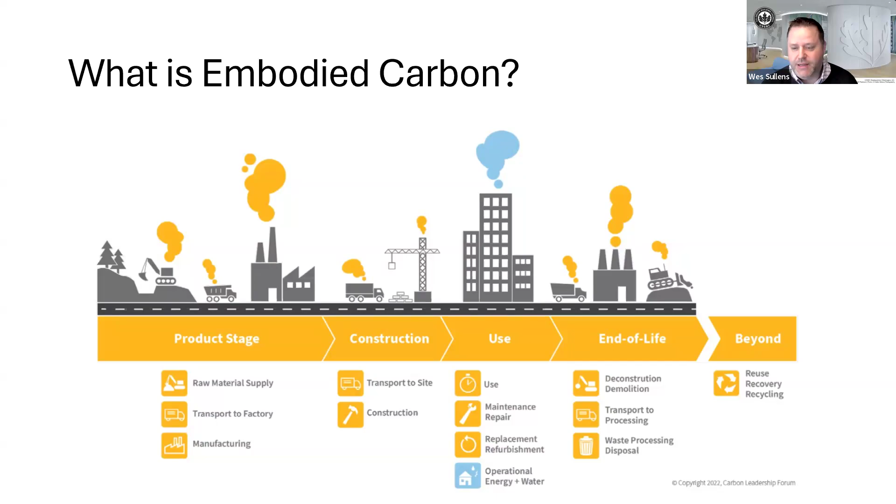And typically our policies have been focusing on operational, but in the last 5 or 10 years, there's been an increased focus on embodied carbon. And you might ask why that is. Well, the next slide shows a snapshot of the global stage of where emissions are at. Globally around 11% of greenhouse gas related emissions are attributed to building materials. Now that's at least, because we've seen studies that go higher than that. And in California in particular, it's probably much higher. But at least about 11% of global emissions, which is a big chunk of the GHG related pie.

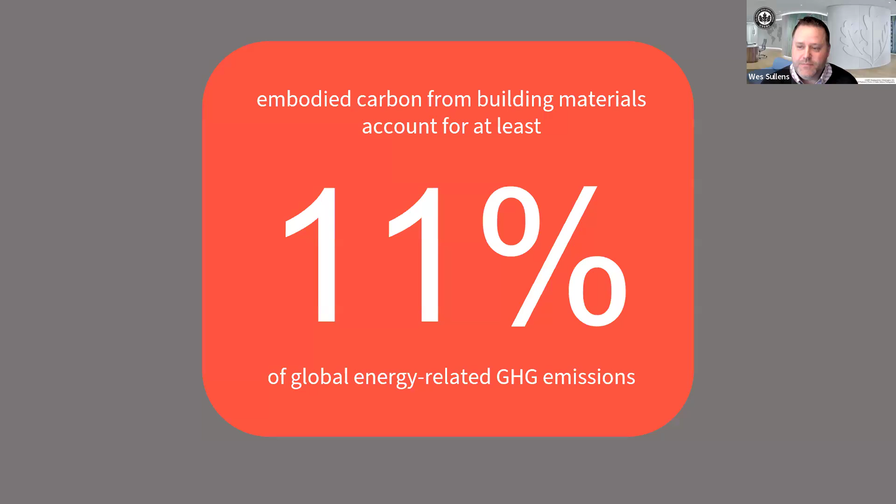On the next slide, you'll see some more recent data. I borrowed this from our friends at CARB, the Air Resources Board. They had a webinar workshop last week talking about efforts they're doing to cut down on embodied carbon of materials. And they shared this stat that essentially as California's building codes require near zero emission buildings, operating buildings with renewables and our renewable standards for all of our fuels in buildings, the embodied chunk of overall emissions has been growing and is now approaching something like half of all emissions from buildings.

Now, this study they referenced was from a subset of like 30 or so non-residential buildings and some residential. So it's by no means a cut and dry subject, but somewhere on the magnitude of half of the emissions come from embodied carbon in California's new building stock, which is a huge number. And again, as buildings get more efficient, those operational emissions are shrinking, but the embodied are going up.

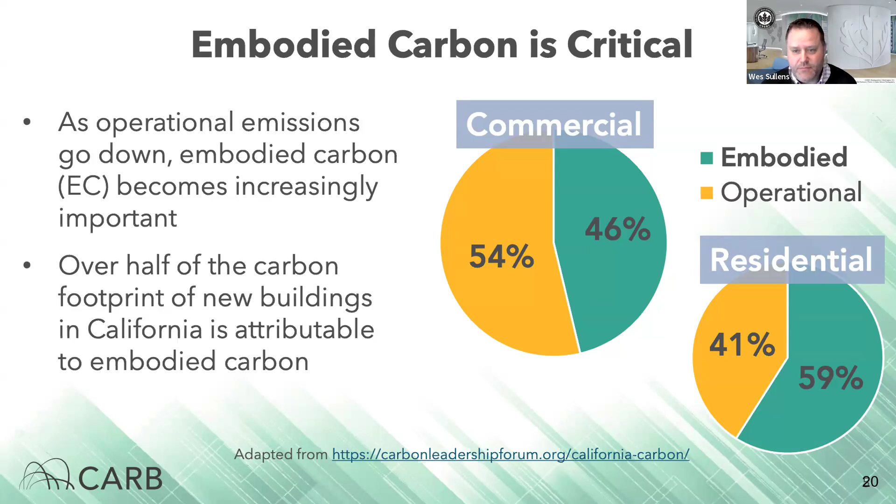On the next slide, this question of what do we tackle first, operational or embodied? And the answer is it's no competition. We have to do both, because a high embodied carbon building with low operating carbon still has a lot of emissions overall. Conversely, if you have a low embodied carbon building, but it's got high operational energy, then you have, again, high total carbon emissions. But what we need are buildings that do both. They're low carbon up front in the embodied carbon. They're low operational. There's end of life steps you can take to recapture those emissions and put them back in the system, and you end up with lower total emissions overall.

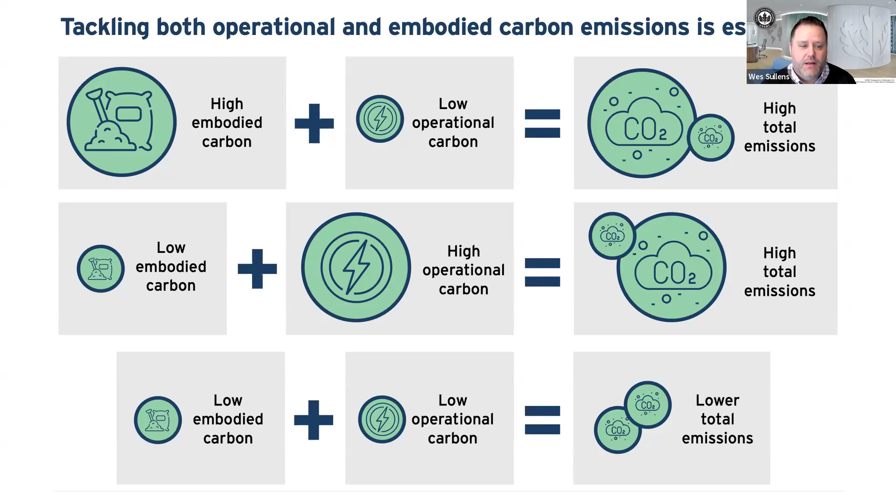And in addition to that, there's no one single thing you can do to cut embodied carbon, but it's really a combination of interventions that result in the deepest reductions. And so you need to do things like consider reusing a building or salvaging the materials, building your building more compactly or optimizing the structure so that you're not over-engineering the concrete or the steel. And then once you're in the phase of actually designing the building, go and select the lowest GWP products possible.

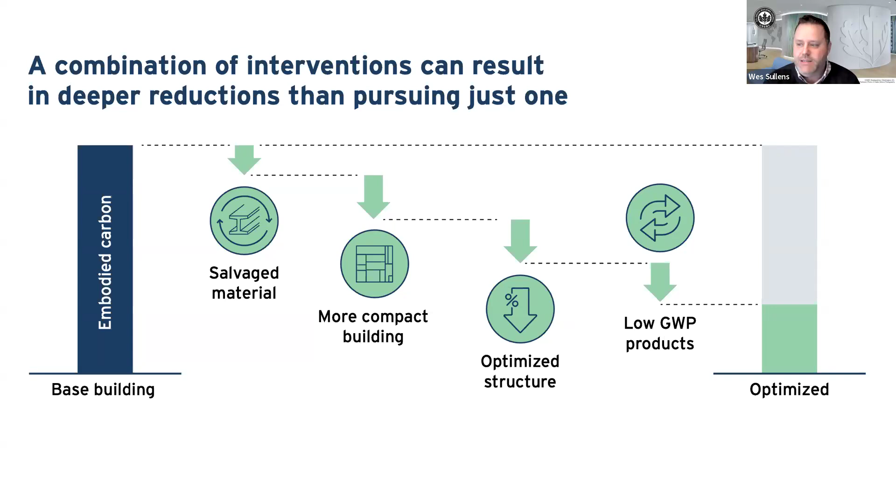On the next slide, I'll give you a second to snap this QR code, but this is a study we did with RMI. There it is, thank you. USGBC and RMI released this report at the end of 2023 on driving action on embodied carbon in buildings. And all the infographics you just saw were from that report, and I encourage you to check that out as a way to learn more about how to reduce embodied carbon in buildings. So I'll give you a second to snap that QR code.

And this is really, it was the first code in the nation to address green buildings. And just last year, they started requiring embodied carbon reduction measures. And the way this applies, it was meant to be a modest entry into this space because there's quite a learning curve for our industry to pick up the embodied carbon strategies and how to cut and reduce them. So it started with a modest attempt at applying embodied carbon reductions to the largest buildings first.

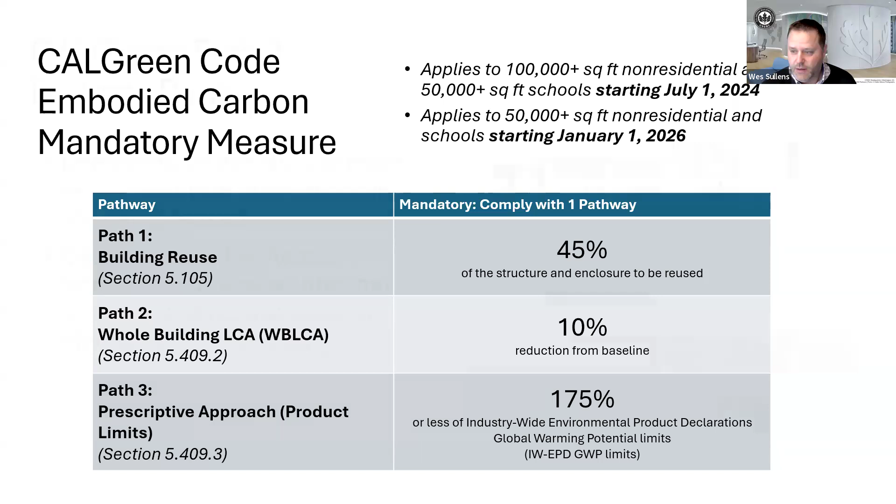So 100,000 square feet and up non-residential new construction buildings are covered under this code requirement. For schools, the threshold is 50,000 square feet, and that all started July 1st of last year. Now, starting in 2026, the idea is that threshold will ratchet down to 50,000 square feet, and projects will have to meet one of the three pathways to cut embodied carbon emissions: building reuse, whole building LCA, or a prescriptive approach using EPDs. The next slide, I'll show kind of a deeper dive into the first path.

Building reuse, I'd say the highest and best thing you can do is reuse a building, because if you don't need to build new, you certainly are emitting a lot less embodied carbon than getting all those materials new. And so it was recognized that a significant reuse, like I would even say, 30, 40, 50% of building reuse would be well and good, and you wouldn't have to do any of the additional pathways to cut embodied

carbon emissions from buildings. So the state recognized this by putting in an easy path, if you will, showing that if a project team reuses 45% or more of the structure and enclosure, they do not need to do the rest of the code measures. That it is sufficient for saving embodied carbon.

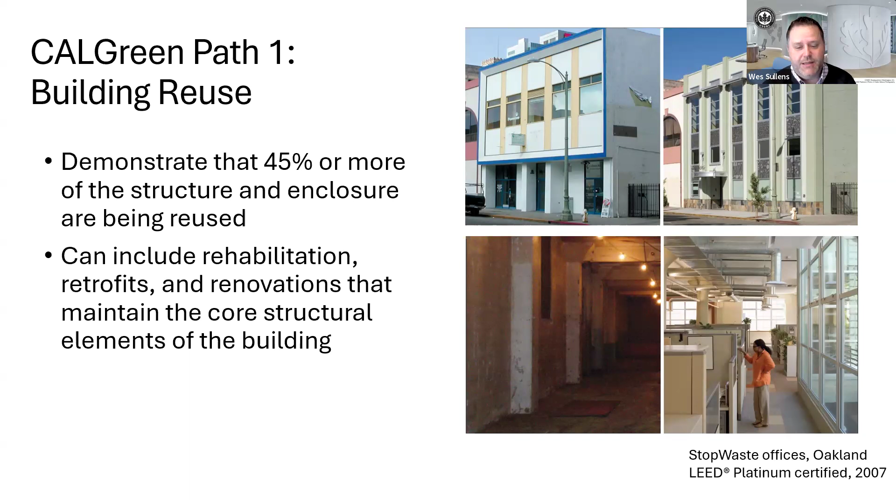The second path is whole building life cycle analysis. And it's like doing an energy model for your building, where you use software typically to show a baseline of what the building you're building would have been if it met all the kind of just industry average values for embodied carbon. And then you do a comparative assessment of that, showing reductions from choosing better products that have lower embodied carbon, or better strategies like dematerialization or lightweighting of elements of the building, things like that.

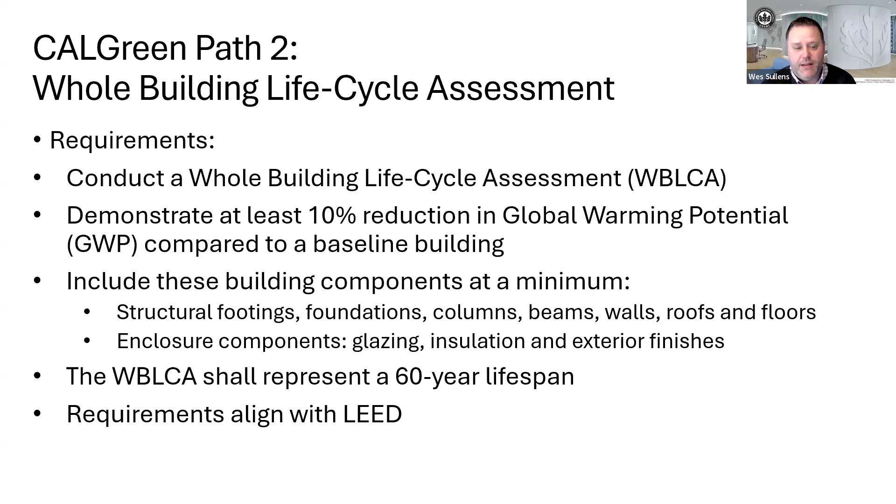And whole building LCA is requiring the project to analyze the structural things like footings, foundations, columns, beams, things like that, and some of the enclosure components that have some of the highest embodied carbon. These requirements do align with the LEED rating system. That was intentional because probably the most whole building LCAs that have been done in California have been on LEED buildings so far, on those larger buildings.

Now, the third pathway that's included in this code is EPDs. EPDs are basically kind of a nutrition label for products, where it displays on a document the global warming potential, the GWP it's called, of each material. And in the code, you have to basically show that you're doing not too much worse than industry average. So it's an interesting thing. They say 175% of industry average. So you cannot be that much worse than some of the average products.

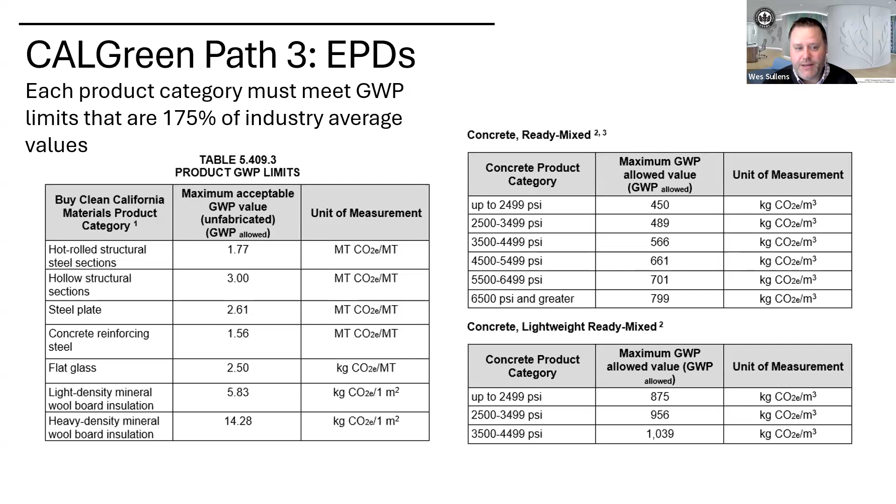It's not a total reduction yet, but it's the idea of getting folks used to the language of EPDs, collecting this data, getting it from manufacturers and concrete suppliers and such, and then putting it all together in a way to document that you're meeting or beating the limits shown on screen. So the way it's listed is, for each material that's on the left column, you have to meet the GWP limit or exceed it, meaning reduce it, and compile those all together to show that you're hitting the target.

Now, an EPD, on the next slide, I just put an example of what an EPD is, because they can be kind of daunting to find the information, but they're typically a PDF or something. They're getting more digital as the days go by. But you'll have a product from a manufacturer like this one, and it'll have some analysis and maybe a diagram or something that talks about the processes to make a product.

And then there's tables of results, like the one you see at the bottom middle, showing global warming potential and other impacts, because an EPD looks at not just global warming potential or GHGs, but also things that affect the life cycle, pollution, eutrophication, smog, things like that from the life cycle of a product. And then there's lots of signatures and standards that have to be followed. So EPDs have to follow a number of rules to make sure they're credible and can be used in CALGreen and other places.

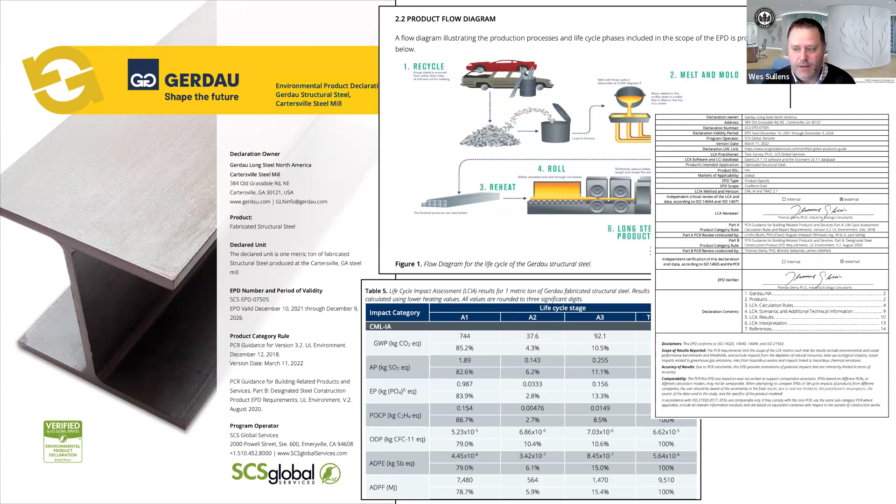So beyond that, there is action happening on codes at the state and federal level. There's the Buy Clean California Act, probably one of the first in the country, which requires the state to procure specific materials that are lower embodied carbon on their buildings. And that has since spread to other parts like CALGreen. CALGreen is kind of a reflection of some of those Buy Clean requirements into the building code.

There's also some efforts by the state to further regulate that with additional legislation. And that's what the California Air Resources Board is working on right now, to create a framework for measuring carbon. That's the bottom left slide. And by December 2028, they'll have a strategy to reduce emissions with a goal of a 40% reduction of those covered projects and materials by 2035. So very ambitious. There is some action at the federal level, although that is kind of yet to be seen, and it's on hold at the moment.

For local government leadership, there are some examples like a low carbon concrete code that was put in place in Marin County and Palo Alto. And in Emeryville, there's mass timber bonus points. Mass timber is considered low carbon compared to, say, a structure that's made of concrete or steel, although lots of mass timber also has a lot of concrete and steel, so they have to be done carefully. And you have to look at how the wood is sourced.

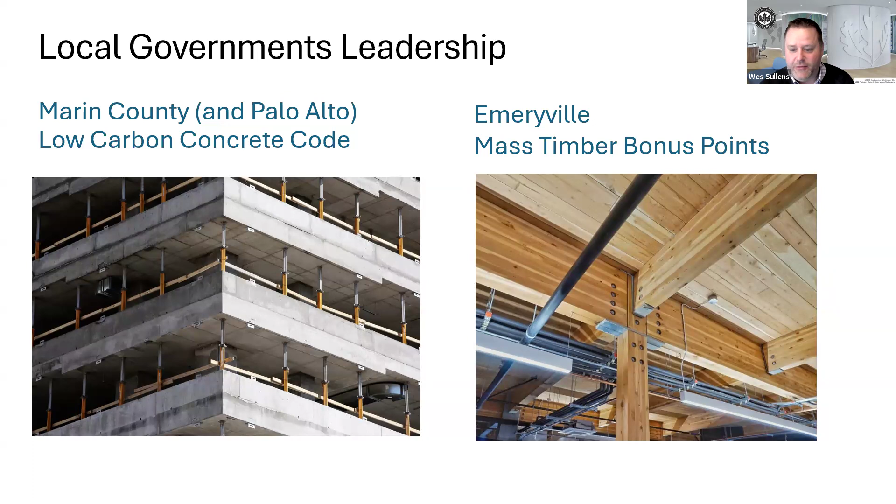And then just the last slide on local government leadership: lots of climate action plans are now picking up embodied carbon measures. I have a partial list on the left. There's probably more. But the idea is that you can put these in your climate action plans as measures for local leadership as well as for private sector strategies to reduce embodied carbon. And we're seeing more of that.

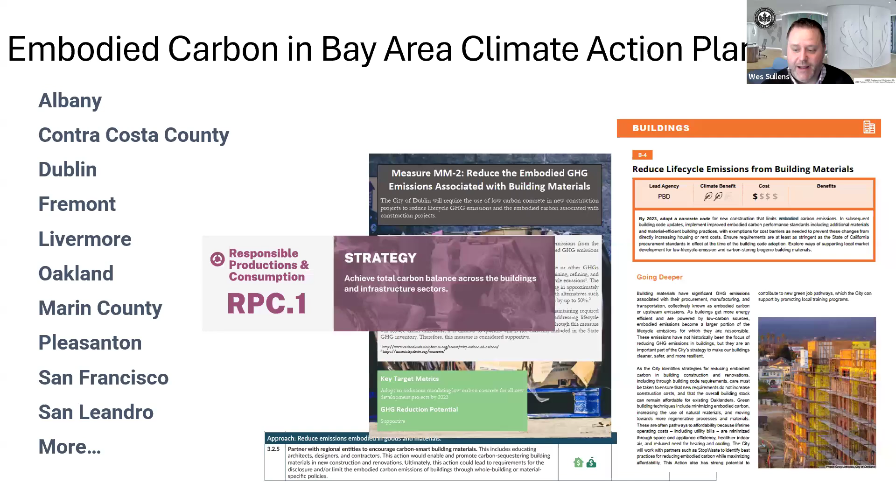Now, for just the last couple of minutes here, I want to share what we're doing at the U.S. Green Building Council and LEED with the most recent version of the rating system, which is going to be in place very soon. We're in the final stages of getting members to ratify the rating system, and our goal is that by May of this year, we will have LEED version 5 out and ready to be used by the market. So we've gone through over a year of public comments and refinements of the rating system, so we're really excited to be at this point.

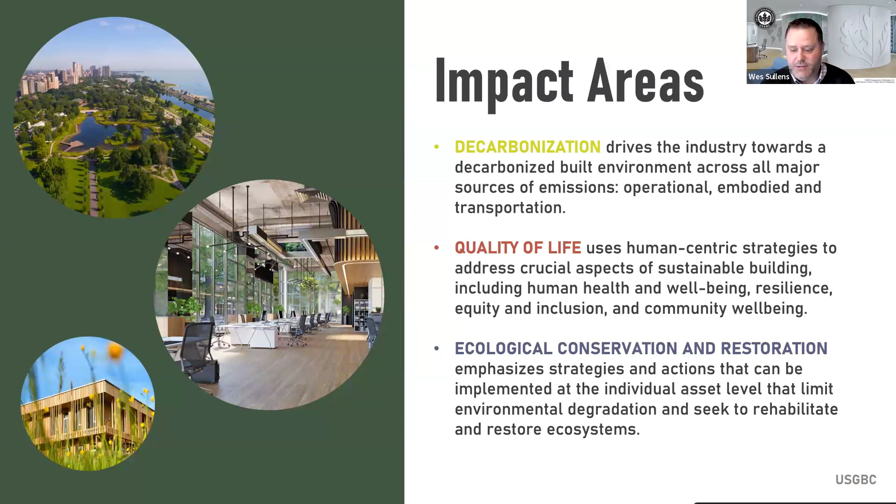And in LEED version 5, we have 3 major impact areas we're trying to address through the rating system. First and foremost being decarbonization. That's going to make up about 50% of all of the points and credits in our rating system, followed by quality of life and ecological conservation and restoration. And just drilling down one level deeper on decarbonization on the next slide, what do we mean by that? Well, it really is a cross-sectional approach to decarbonization. It's, of course, things like energy efficiency, electrification, renewables, also refrigerants, but we're tackling embodied carbon as well.

The structure and enclosure, the materials we make our buildings out of, those are all now part of the rating system to gather points. And we have a new prerequisite. Prerequisites are things that you have to do to get certified, and then a lot of voluntary points are on top of that. But the prerequisite is to measure the embodied carbon of their structure, enclosure, and hardscape. So that's a big new thing that hasn't been in LEED before, and we're excited to get that out into the market.

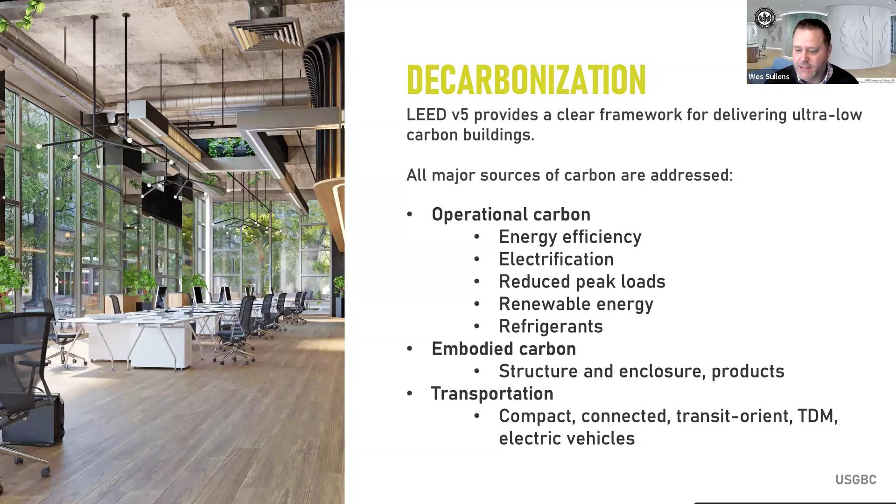We also tackle things like transportation emissions and how people get to buildings, and the site as well, some of the landscaping and hardscapes. There's ways to address those and reduce carbon and get credit for it in the rating system. The next slide is not one I expect you to be able to read very carefully, but it's a snapshot of the scorecard for this next version of the rating system. If you're familiar with LEED, there are typical categories you see there, like sustainable sites and water efficiency, energy and atmosphere.

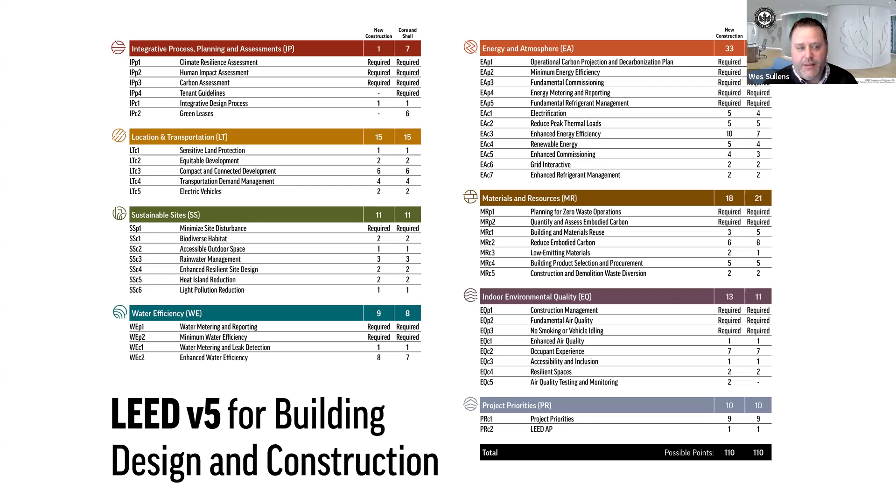And under materials, there are a number of points there. You see one on reduce embodied carbon, and there's the prereq up top. But there really are a bunch of points now, probably about 15 or so points that target embodied carbon in LEED version 5. Another way to look at this is we have also provided a list of LEED credits by their impact areas, those three I mentioned.

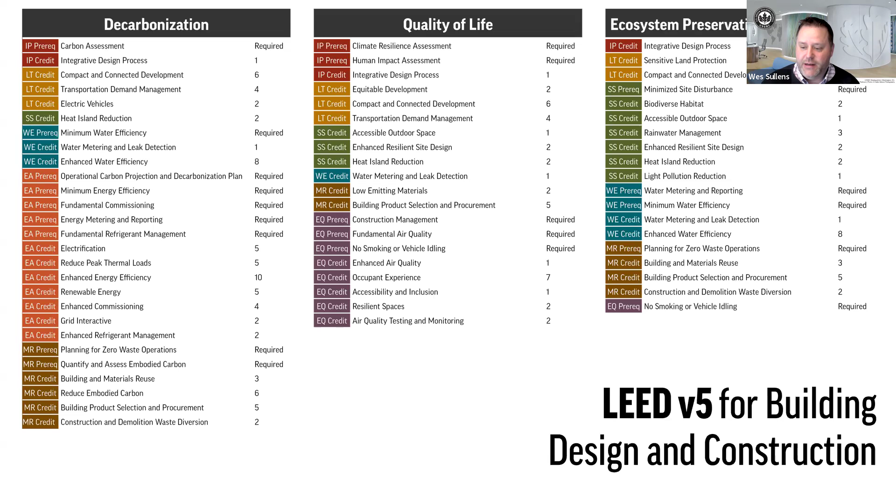And so you can see on the left there under decarbonization, it's kind of a rainbow of colors because there are decarbonization strategies throughout almost every credit category. And there's an emphasis on, again, energy and materials, but also on the site and other places as well. So we hope it'll be a really useful rating system for the market, and we're excited to launch it soon. So on the next slide, there's a QR code for learning more about LEED version 5.